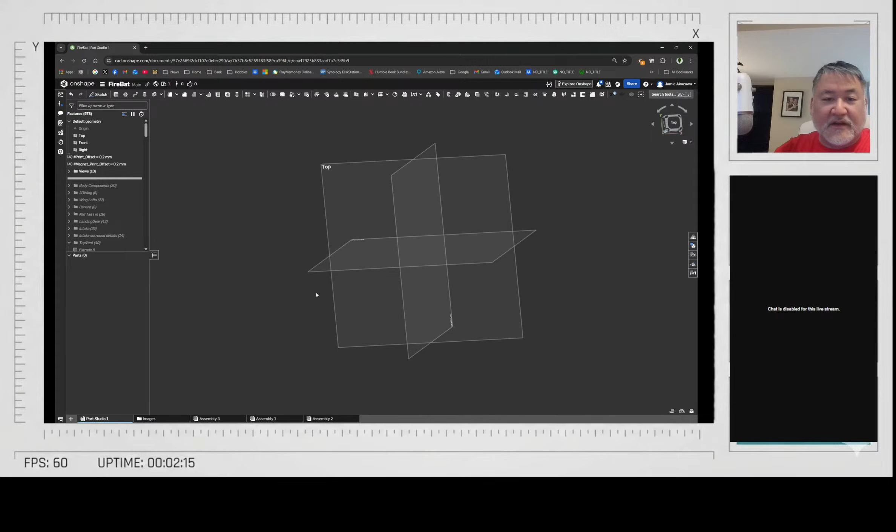You can scroll with your mouse wheel, then right click and rotate around. You can see I can move the front plane, right plane, top plane. Pretty simple, just takes a little bit of getting used to.

From there, what I did was go through my tree. I established what views I wanted to do. I think what Mark's doing with his work on his helicopter design, you can also see how to set that up.

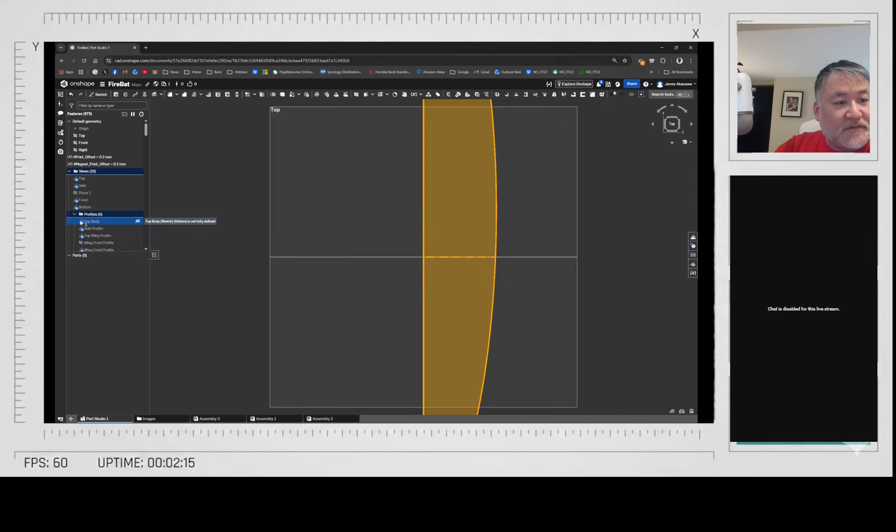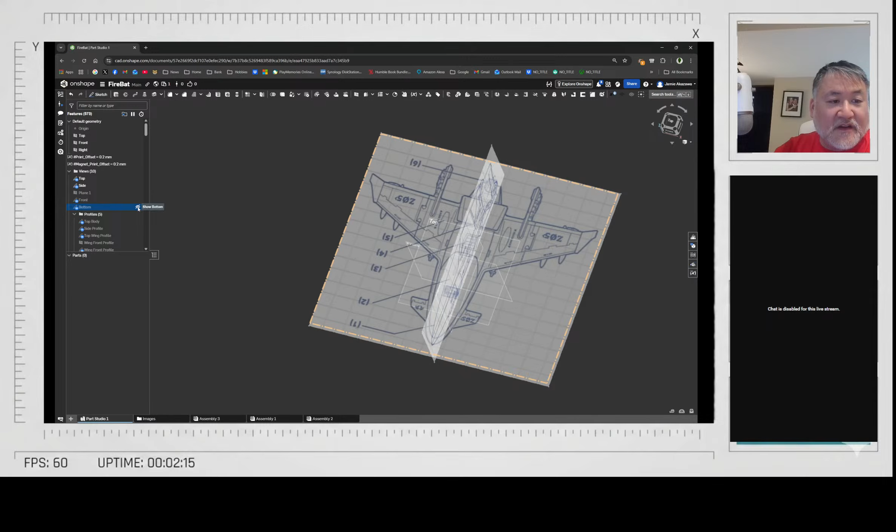I've set up a bunch of different views. What I did was import from the 3D Joe site the different views of their Firebat, the blueprint designs they have for it. Then I oriented them, moved them around so that they're in line with each other. You can see I've got the top view, side view, front view, and bottom. I actually added the bottom view, so I would swap that out for the top view depending on what I was working on.

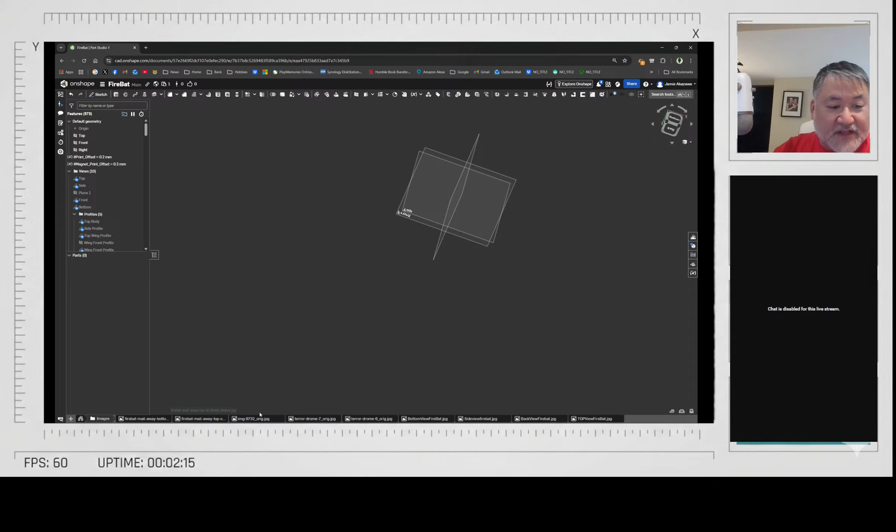To get the views in, you can click down at the bottom here, insert. You can import your different images. So in this case, these are the images I imported — I imported a bunch of reference here.

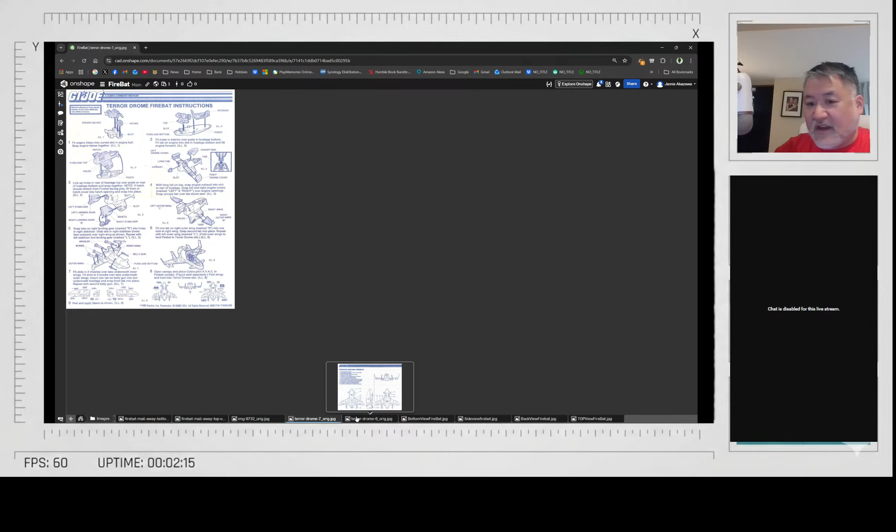I also imported the reference for the instructions on how to assemble, so I can take a look at that and see if there's any information I want to see there. Here's the reference image. What I did was crop all the images out from there, separating them into various fragments, so you can see the top, bottom, side views, etc.

Once I had them there, I established sketches for each of these views. From there, there's a button up here where you can import an image onto a sketch. So say I am in this view.

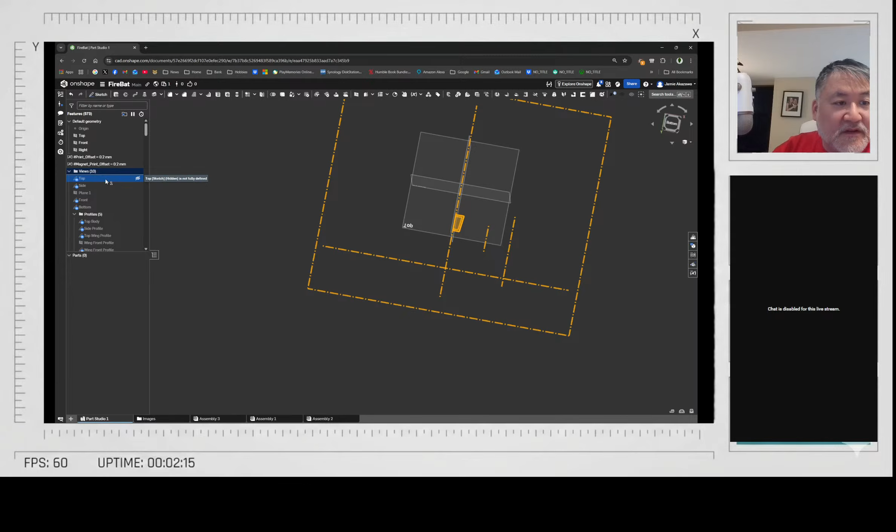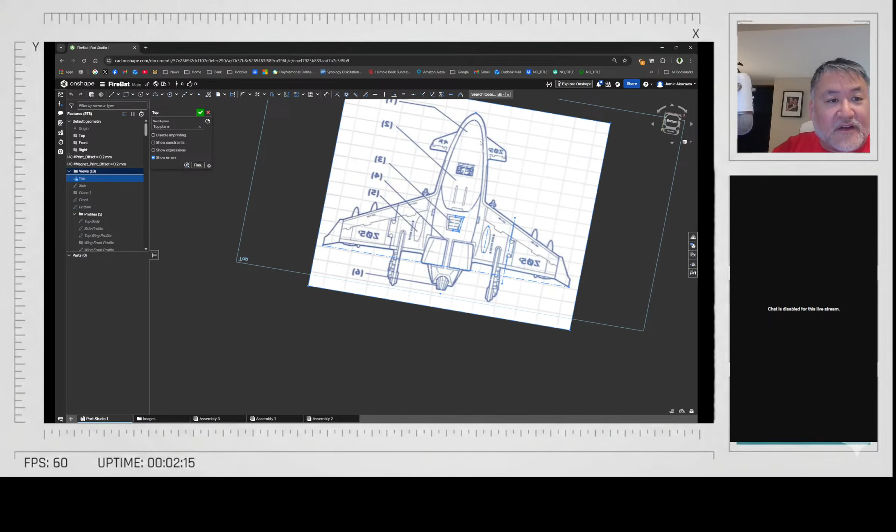When you edit the sketch, there's an option to insert DXF, DWG, or image. So you can insert your image onto that sketch, and then from that sketch you can orient it with various tools. There's a transform tool that will let you manipulate and move the image around so it's actually in the right position. So that's that.

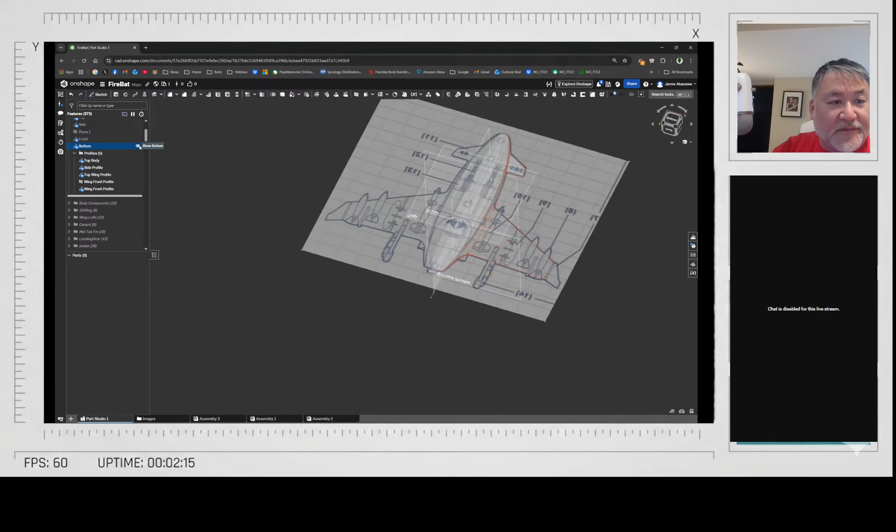From there, once I established those drawings, you started to get into drawing it out. So you can see here, on the top view, I actually activated a bunch of the pictures, but I'll go back a bit.

So the first one, in the order I put them in - this top sketch on the profiles, is probably the top body sketch that I actually started. Oh, here. There it is - so there's the top body view.

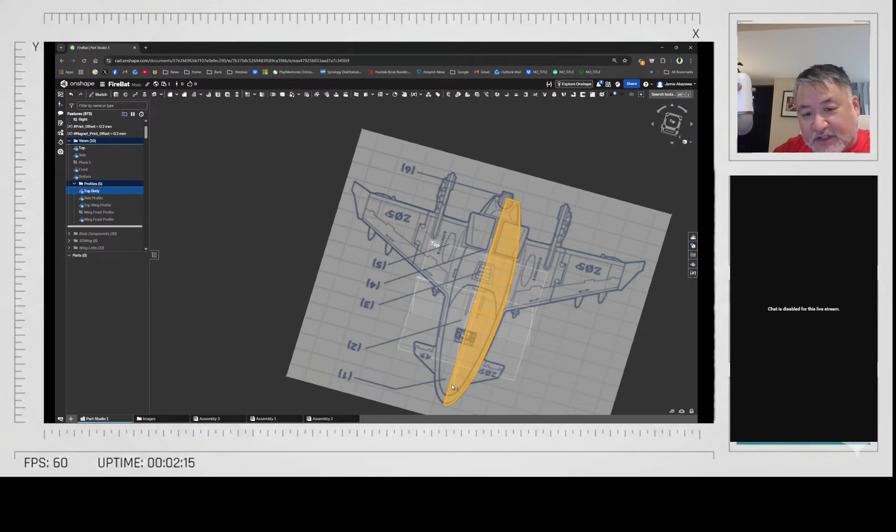You can see how I sketched out the top body. From here, I only did half. Mark's made it fairly clear that if you do half, it's half the work, because there's a mirror function in both the sketch and the 3D modeling side - once you do it, you just mirror it all over and save yourself a ton of work.

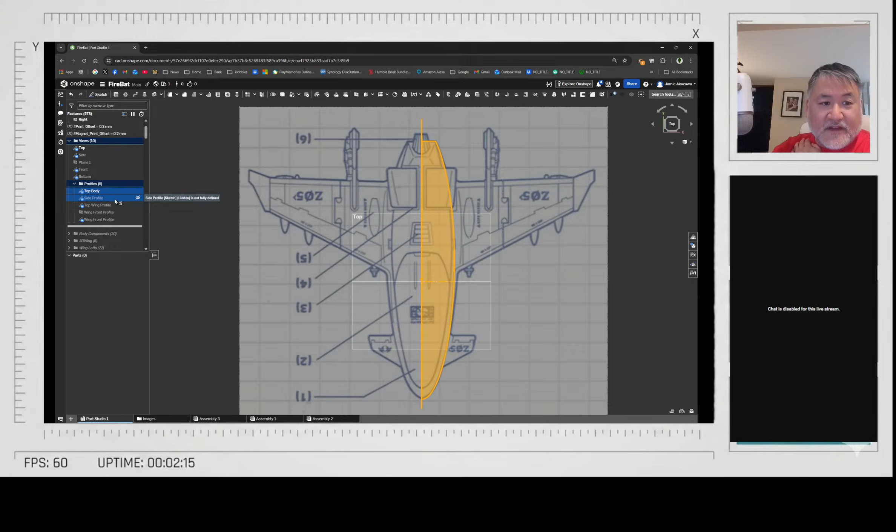So I did the top, sketched out the top, then I sketched out the side view. You'll see a side profile view here, and again that's referenced off of this side view. So you can see I referenced all that, trying to get the geometry.

In the case of the drawing, I had to make assumptions. I couldn't see because this mid-wing here is blocking the view, so I had to guess where that cut was going to be. I put that in, got an idea of what plane goes across where the canard is, where this wing profile is, and where the canopy sits. All that was established right off the get-go.

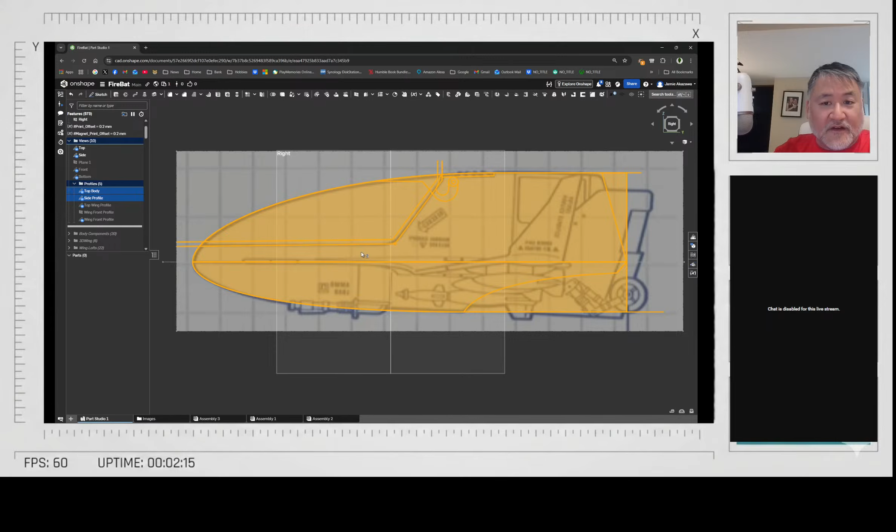From there, I also separated out the wing, so the wing had its own profile. I can hide this view - so you can see I did the wing profile.

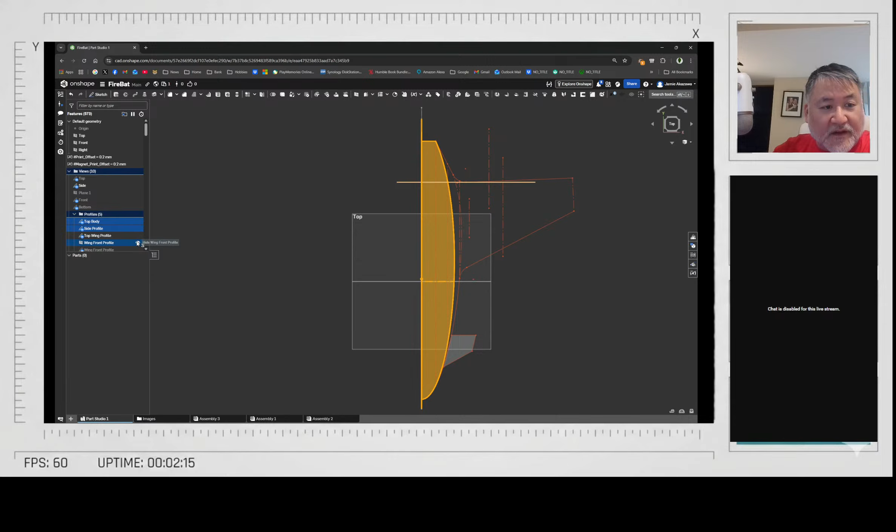Then I also did a profile for the front. This is something a little different than I see a lot of other people who are modeling do - a lot of people, when they model, from what I can tell, will model in big chunky blocks, like a big square or a trapezoid.

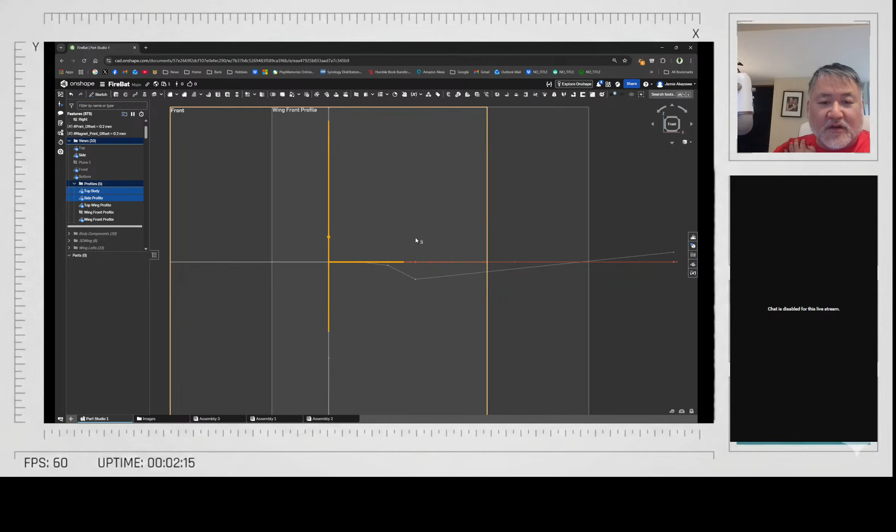I wanted to make my model slightly different, so I wanted this wing to mimic what I saw in the image and in the pictures, where the wing drops and then comes up on a slope - it's not just a flat surface, but has a profile to it. I drew in that profile where it drops some more, gently comes up, and goes off on an angle instead of straight up. So I put that in as well into my drawings.

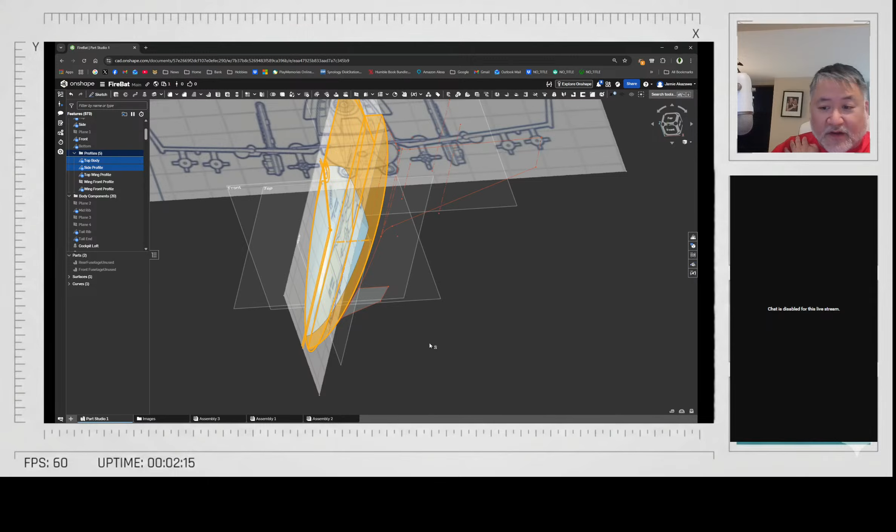From there, once I got all those sketches in, I started on the modeling side. I put in more planes, shut some of these off. That surface we can shut off too - it's highlighted, that's a cockpit loft.

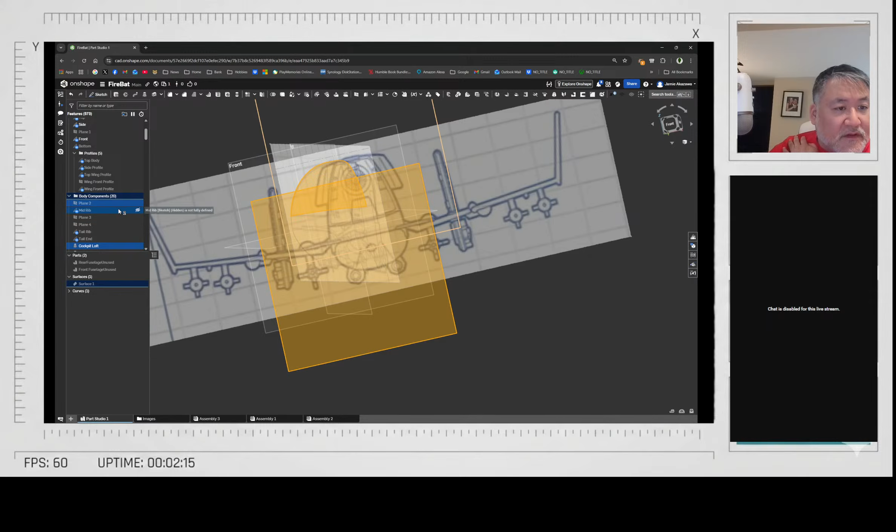From there, I started to put in various shapes that I saw. Let me shut that one off, it's a bit distracting. Let me take this and pull it up to about here.

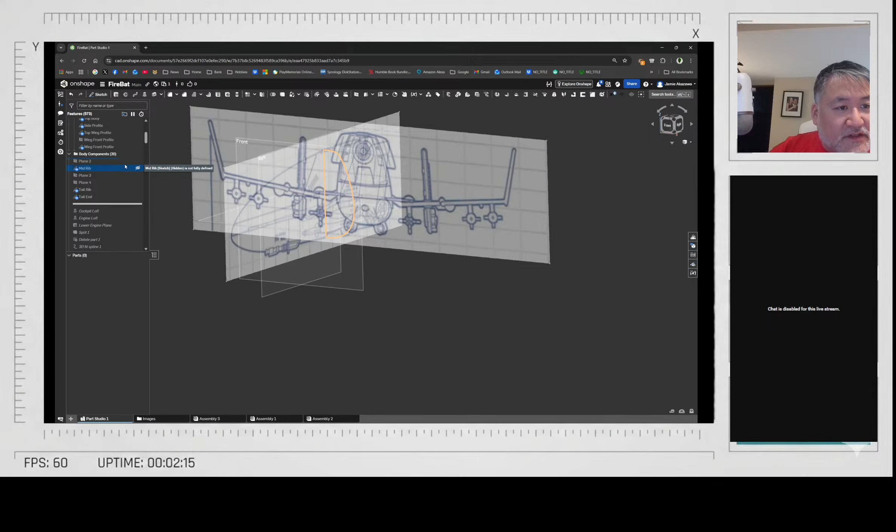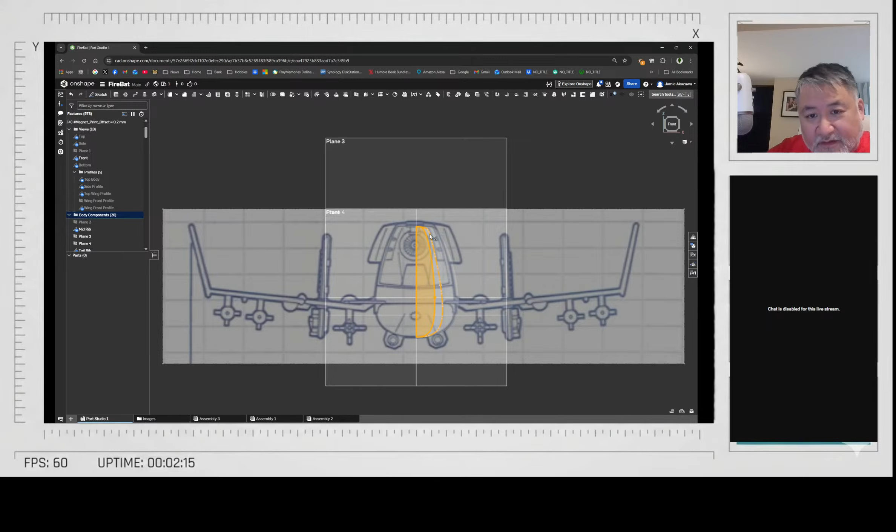So then I started to draw out different endpoints that I saw on the model. I don't know how easy it is for people to see, but I modeled sort of the end of the plane, and back here I did sort of a mid section.

Again, maybe I can pull up this drawing. So from here, I referenced this geometry, which gave me the dimension off of the end, where I thought the end of the plane only goes from the midpoint to here. Then at this point there's another transition with an angle coming off the end, so I put another plane here for that reference.

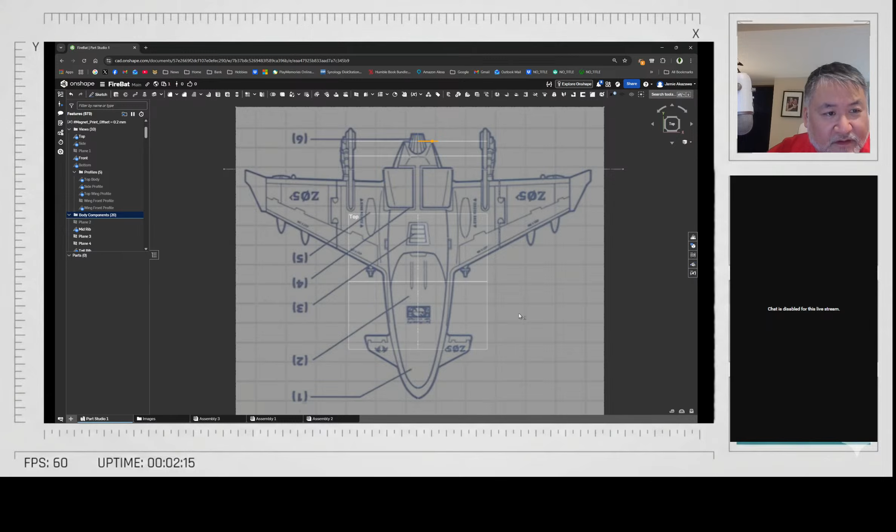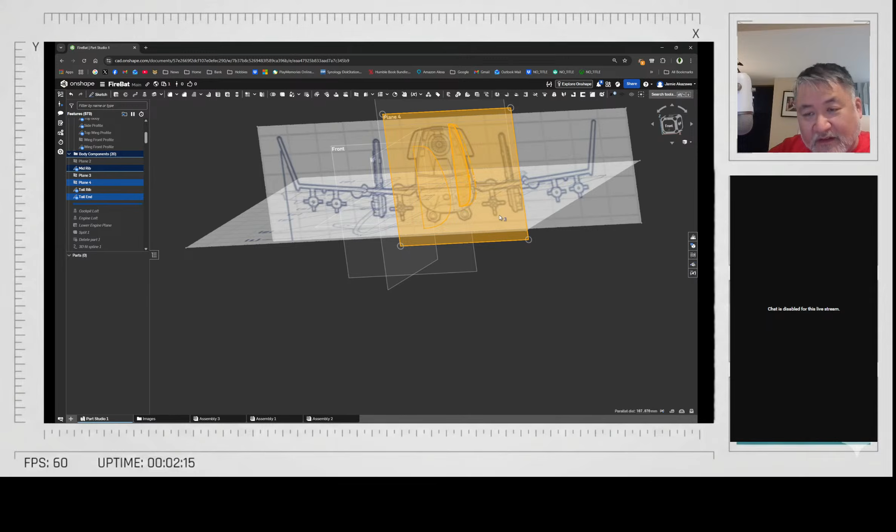And then I put in another plane. From there I actually did another plane - sorry, this is my first time doing this. Oh yeah, here's the other plane, like a mid plane, or mid rib as I called it. So from this point all the way to the middle where it's thickest, and then where it sucks back in and goes in - I put those references in.

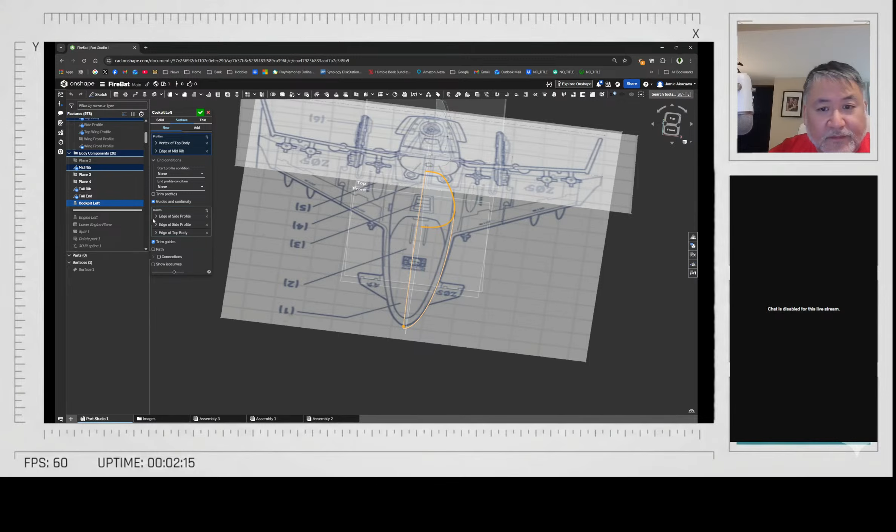Then from there, I started doing the lofts for the plane. And again, this is something that's different than I see a lot of the other modelers do: I'm using lofts. So to get the geometry so that you have a smooth transition and that you actually get a more plane-like feel where it's not boxy, I used lofts.

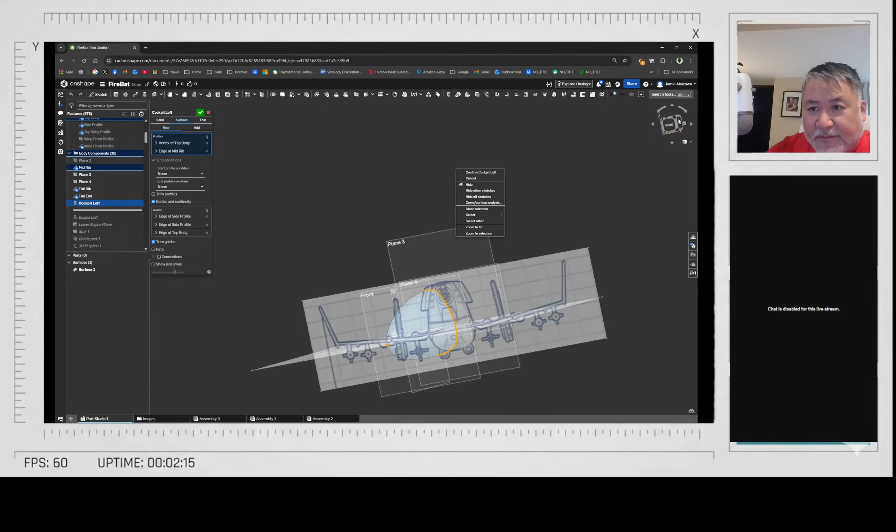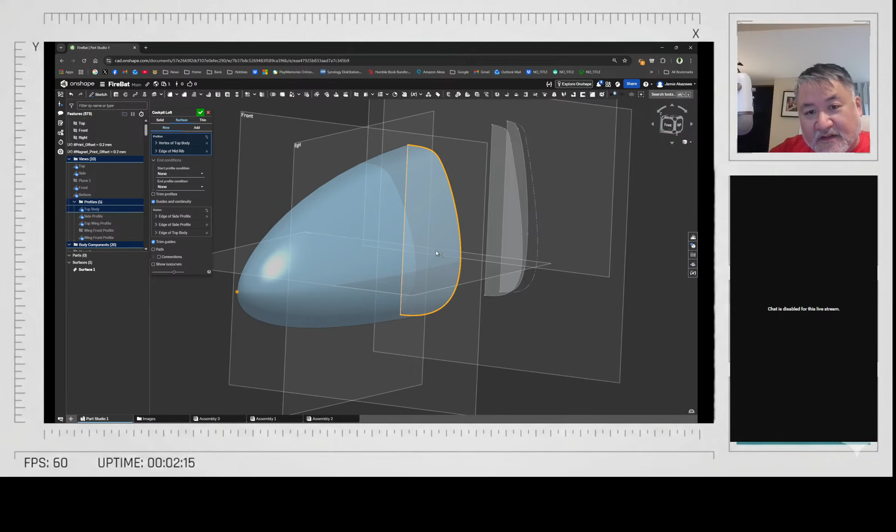So I went from this point and I made a loft that went from here all the way to this midline, or this mid-rib. And you can see from there, if I shut off the top view and the front view, you can see how smooth that curve is, where it goes, and it's a much smoother, it transitions nicely, and that's how it goes through to that mid-rib.

From there, I did another loft for what I called the engine compartment. I can grab that. Oh, I can't. 1 second.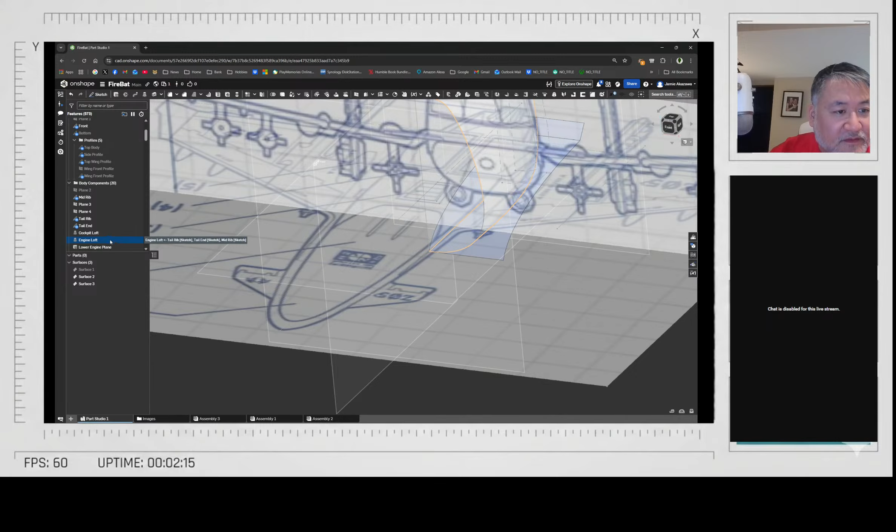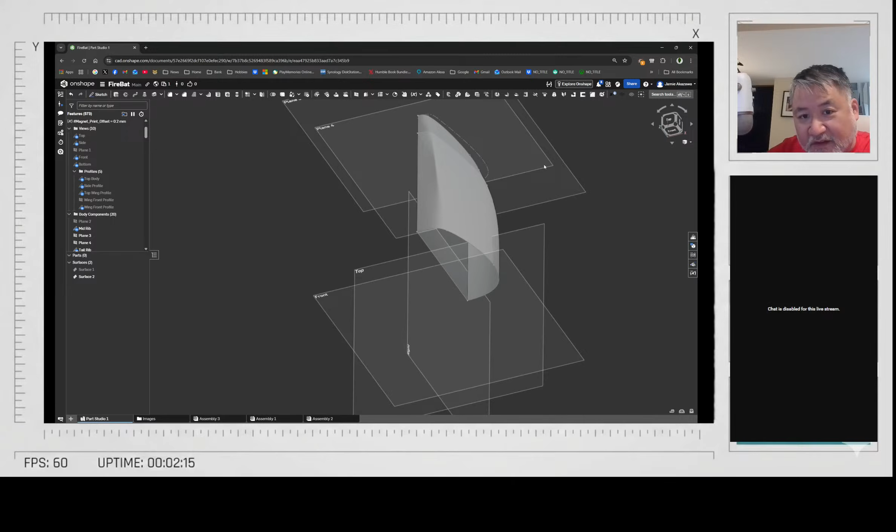So I did another loft for the engine. And again, it's all referencing the drawings. So then from that midpoint, it tapers back in at the end. So I wanted to mimic that taper. So I lofted from this plane to this plane. And again, it transitions smoothly. So then you can have this nice transition here.

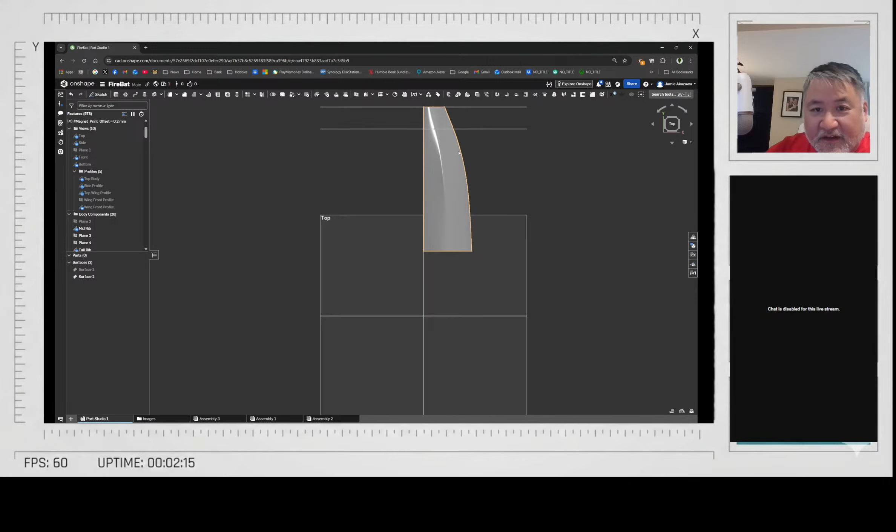And then from there, I thought there was another. I probably could have done this all in one. If that transition is smooth, it probably would have come out equally as nice, if not a little bit nicer, if I didn't have this last bit. But again, I'm new. I don't really know exactly what I'm doing. So I wanted to go from here, transition nicely to here, and then from here to here. So this distance here is a little bit flatter. It doesn't have as much curvature.

So again, all this is done by lofting. So I lofted that surface, and then you get that shell, basically, or the surface. And then that's what generates these surfaces here. So you can see when I actually highlight, now I have kind of the shell of the plane there. And it's two parts. So you'll see this front and the back.

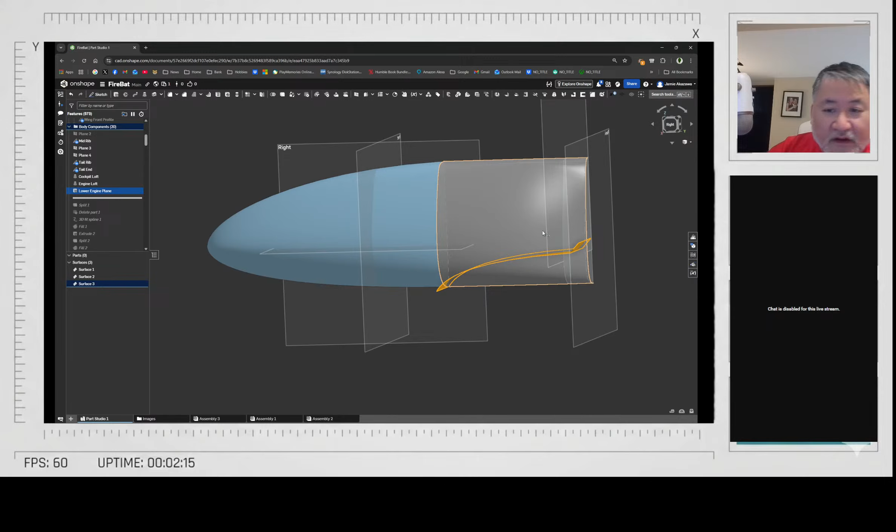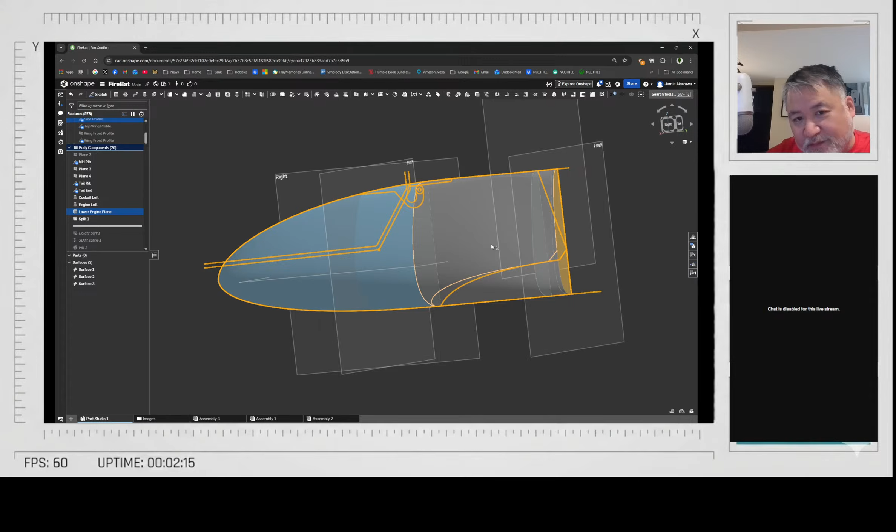From there, I wanted to cut away where the bottom was. So I did a drawing on the side, I believe. I took the drawing from the side view. Sorry, this one here. And then I extruded that surface to cut through here. Then I split the surface. So I actually made that plane, or that surface, cut through the back body part. And then from there, I just deleted that bottom part. So then that doesn't exist anymore. So then that cut that across.

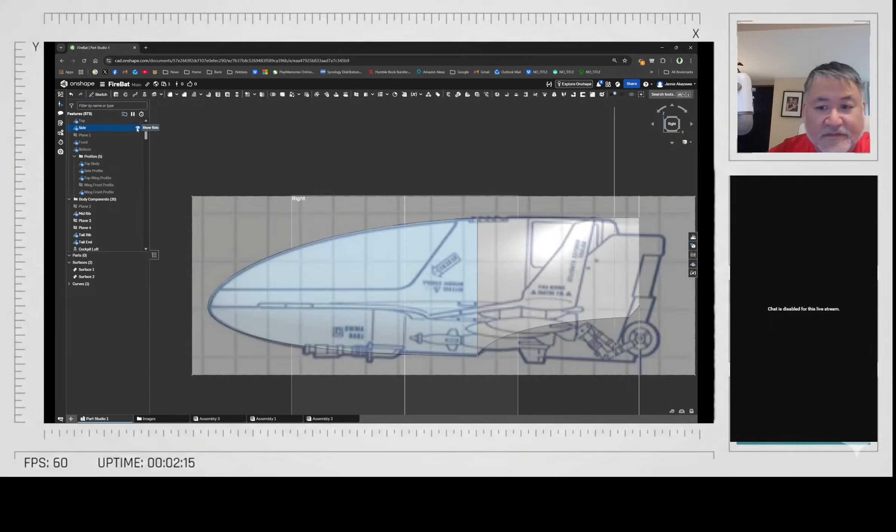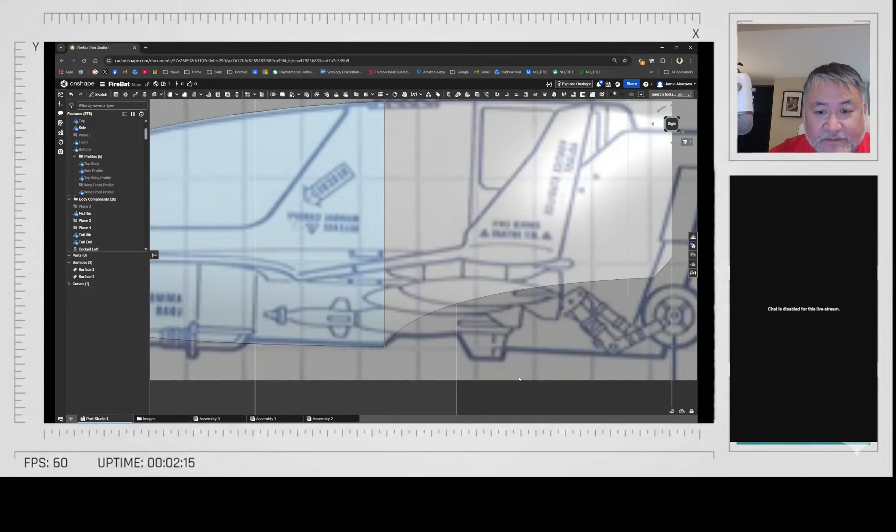And again, referencing the side view, I had this very tiny indication of where that starts and what angle it comes off of. So I used that as reference and said, okay, well, I'm going to do that. And that's where I extended this line through those bodies and then cut that profile out. Again, maybe I'm not using the proper terms. It's all I just do. Then I filled the hole. So this is all fill. And then you continue.

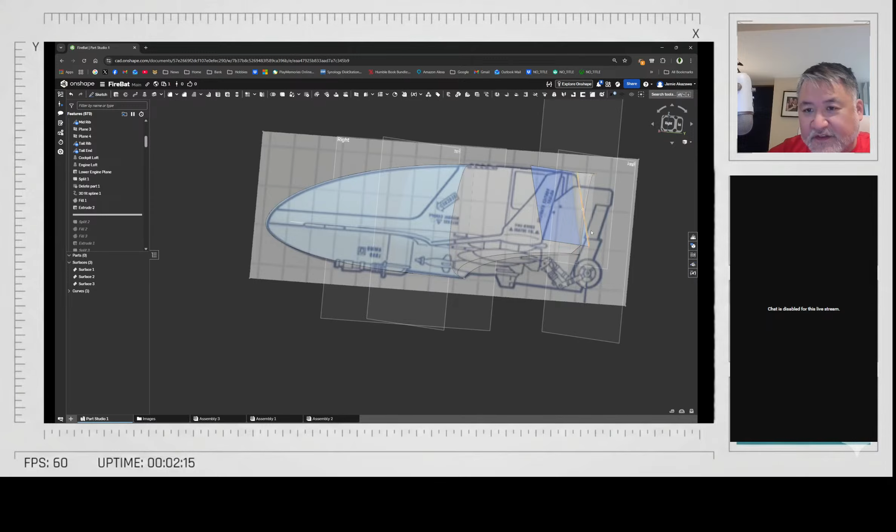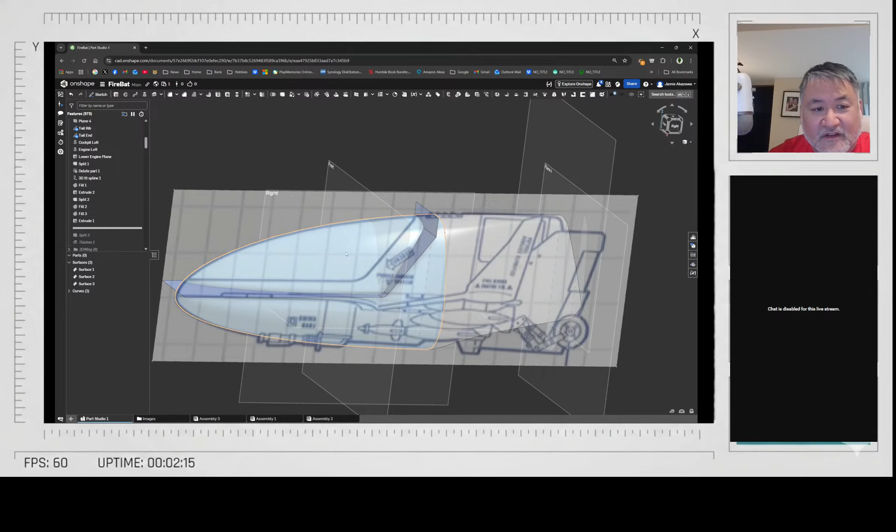Didn't extrude. So again, it's a surface extrude through here, because I wanted that angle through the body. So I extruded a surface out of, again, the first sketch of the side profile. Split it again. And then after splitting it, did another fill. So that's all filled. Did another extrude here of that surface to cut for the canopy. Did a split. So now that's split. Did delete it.

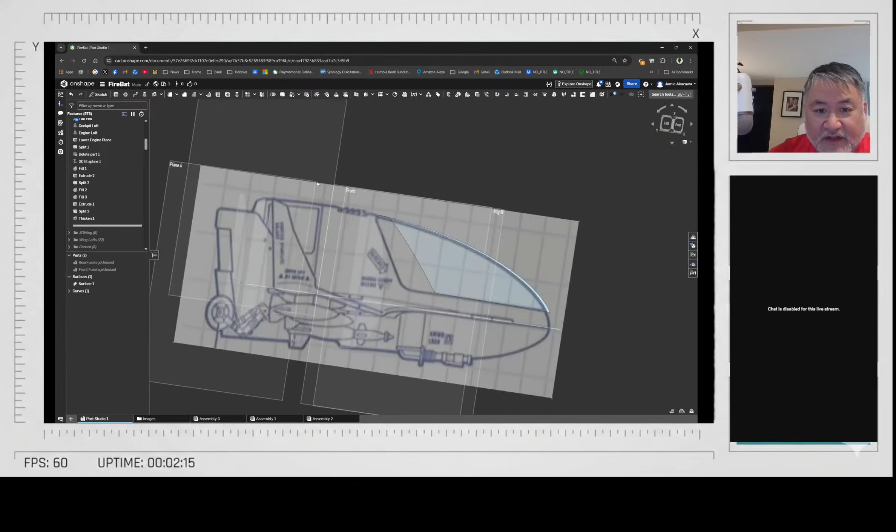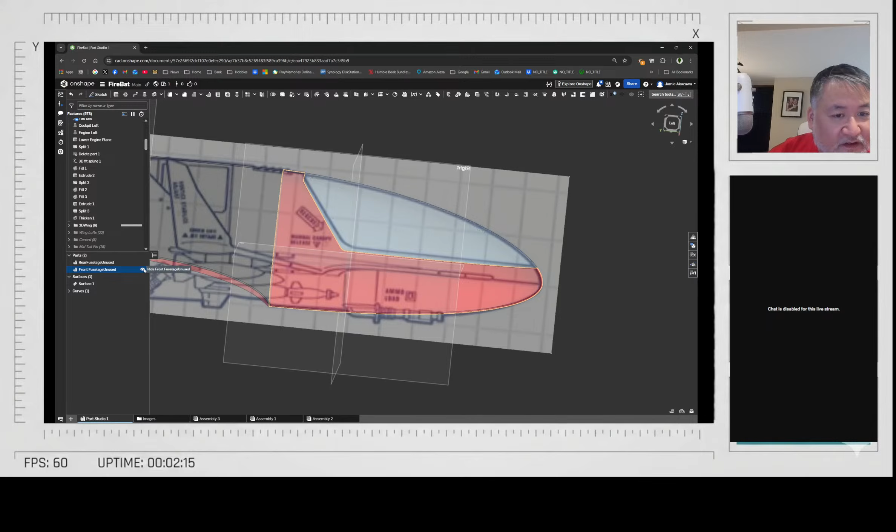Then did a thicken. So now I have my first actual solid body here, which is the canopy, I believe, is what I thickened. Or maybe not. Nope. Sorry, I'm wrong. I thickened the body. I think I left the canopy out for a while. So at that point, now you have the front and the rear fuselage shells. So these are actual 3D shells that can be printed. They have thickness. I believe it's like 1 millimeter thickness. And then that's the body of the plane, of the Firebat.

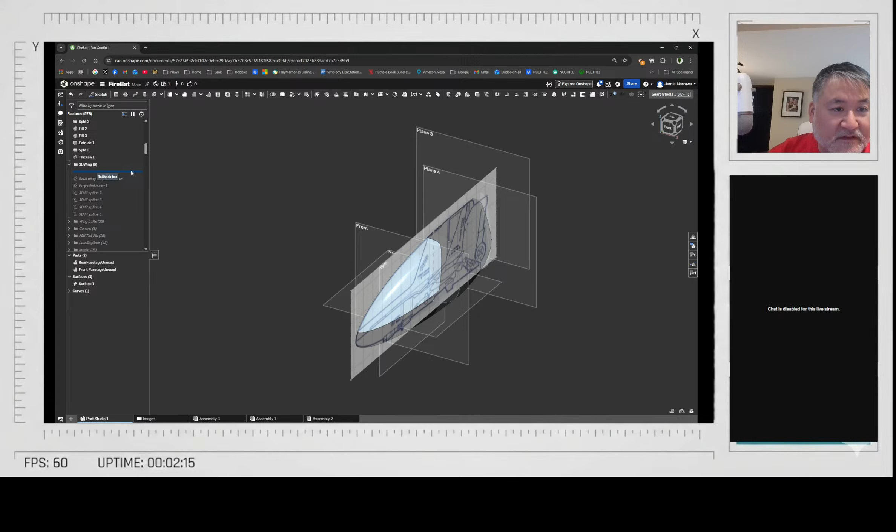Then from here, now I started working on the wing. So the wing, I did a projected curve. So one of the things that's difficult to do is, again, if you're always working in a plane, but you have something that moves through two planes, it gets a little bit more difficult. So I did what's called a projected curve.

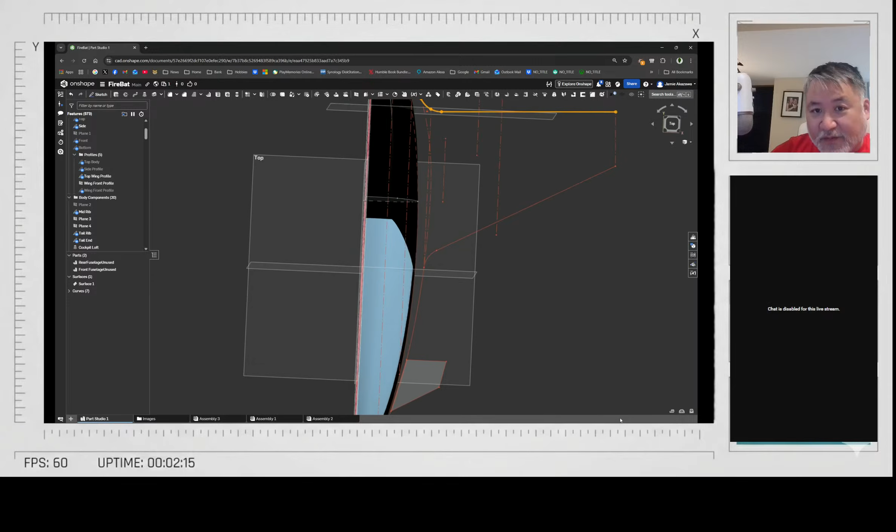So what I did was I took two different curves. If you remember, I did the wing profile. I think I did a front wing profile here, and I did a top wing profile here. The top wing profile shows me the top view where I want that to be. But it's planar, it's all in one plane. It doesn't do me any good that way, because then my wing will be just flat. It'll look just like that. I don't want that. I want it to follow this curvature.

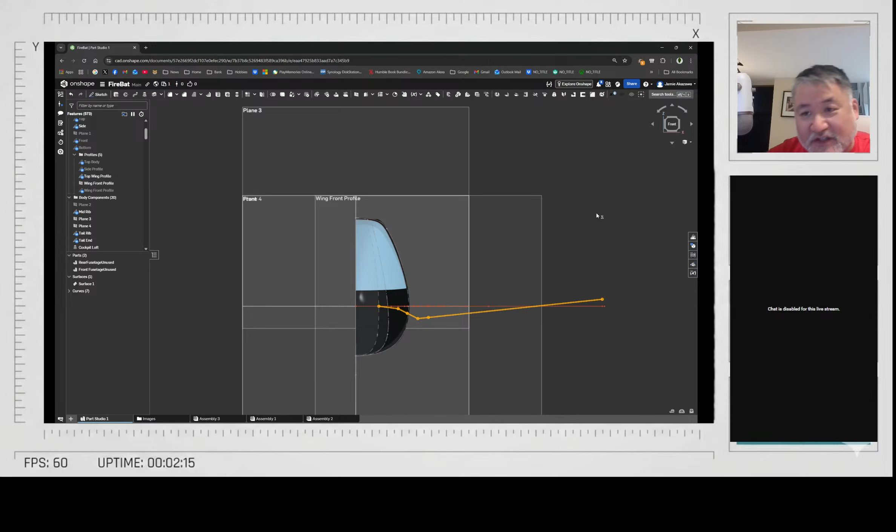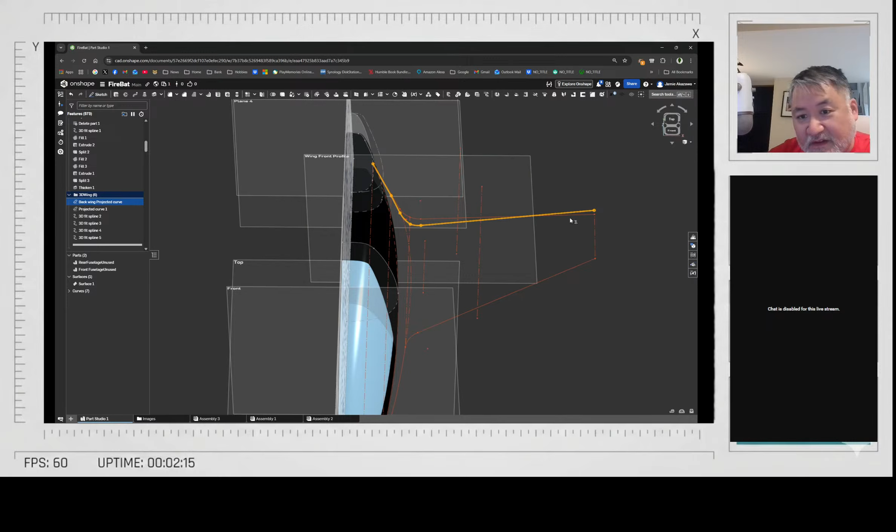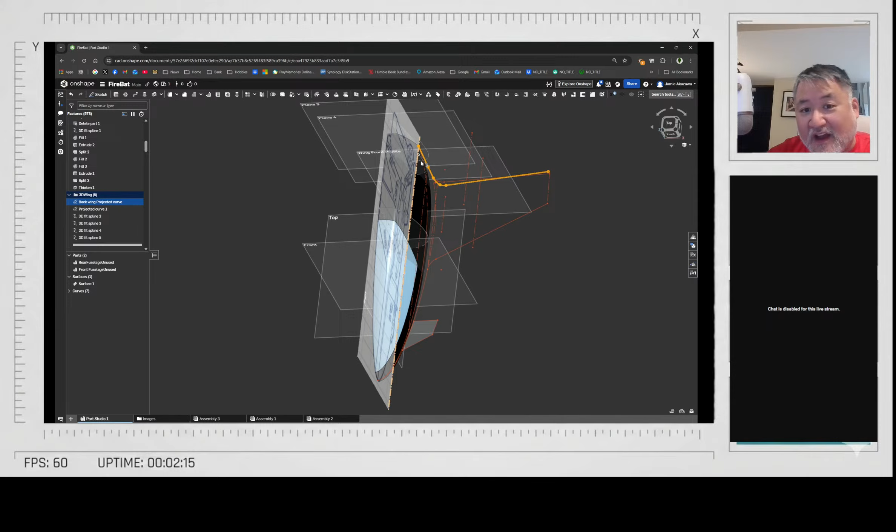So what you do is a thing called a projected curve that combines the two. I had this front view that has this profile here that dips down and comes up. And then I combined it with this top view curve with a projected curve. So now I have a 3D curve that goes through space. It comes out, down, up, right? Which gives you that more organic shape. Instead of very flat geometry, now you have some real shape to it.

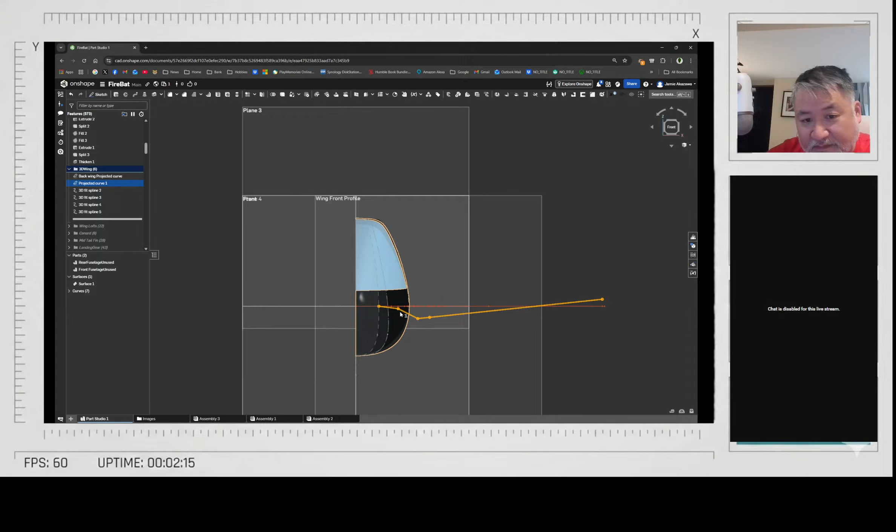So I did that also for the front. Same thing, I used that same profile, so that they mimic each other. So the front and the back are of the same profile here. Then I started to connect them. I had 3D splines connecting those two lines together at various spots. I don't know if they're 100% necessary. I think I just wanted to close that whole shape.

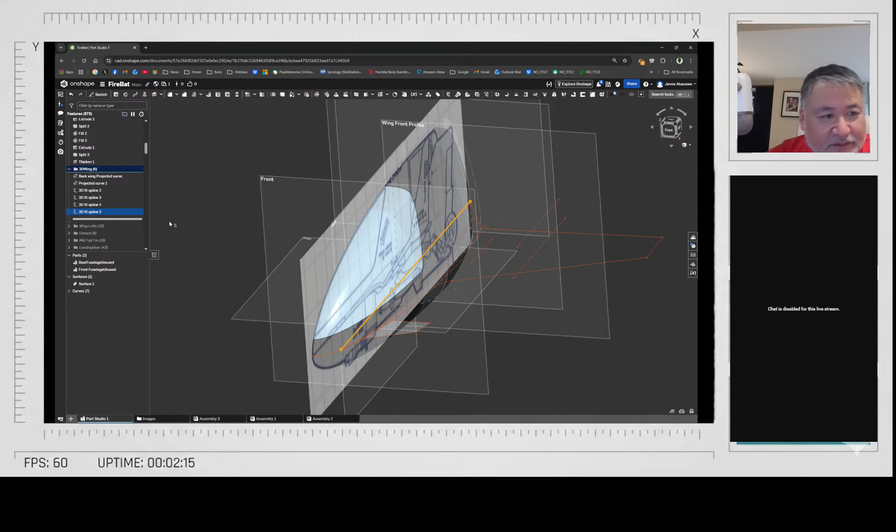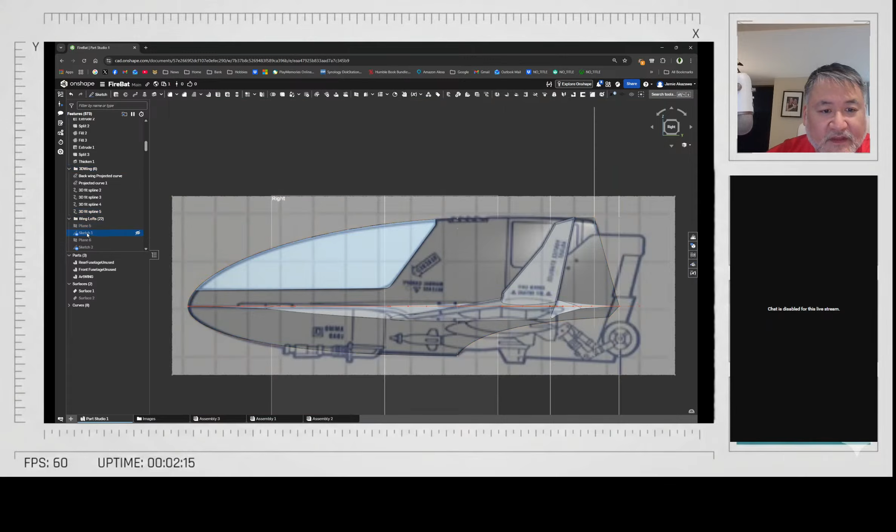But from there, now I wanted to make the wing. You can see here, that's the wing I ended up with. So the wing, again, I started with a plane on this end, generated a plane on the right, generated the sketch. This sketch is kind of on the inside of the plane, but I needed to start somewhere. I wanted that surface to look like this, even though it's not really an airfoil. An airfoil would be bigger in the front and taper off in the back. This is a surface that's coming out of the surface of the fuselage. So I just kind of sketched something out.

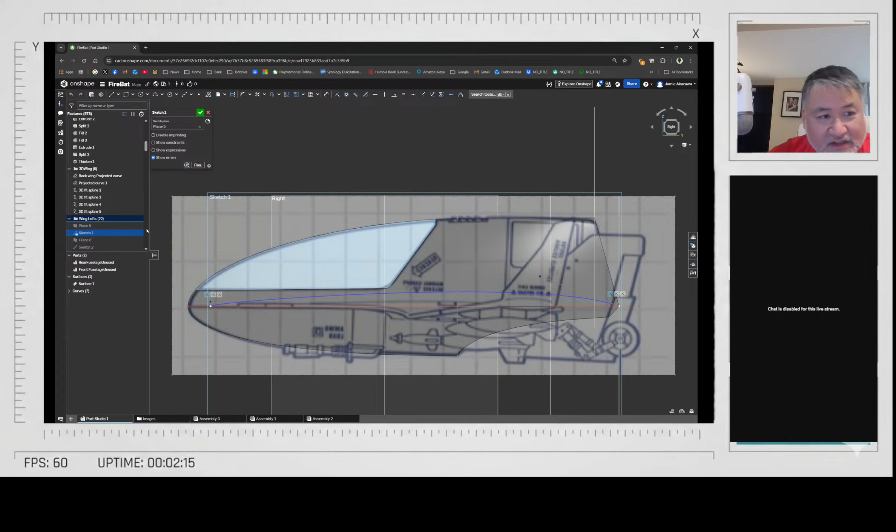Did another plane. Did I use that one? I'm not sure if I used that one there. Getting lost in my own stuff here. Wing lofts. Oh, here's the sketch for that one. Let me shut off some older sketches here so you can see. It can get a little complicated.

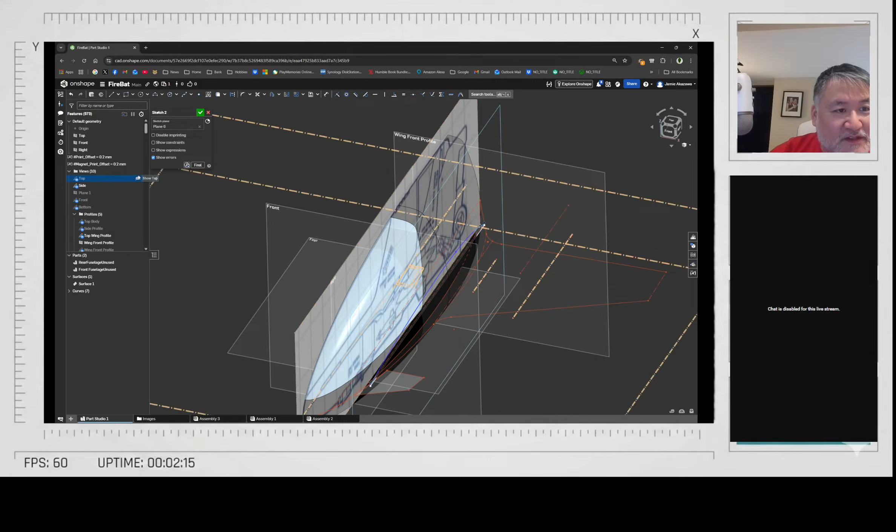This is kind of my first big project that I've selected for myself in Onshape. I think I bit off quite a bit. It's been fun, sometimes frustrating, but ultimately it's been a fun project. But it can get daunting and you can get lost real quick.

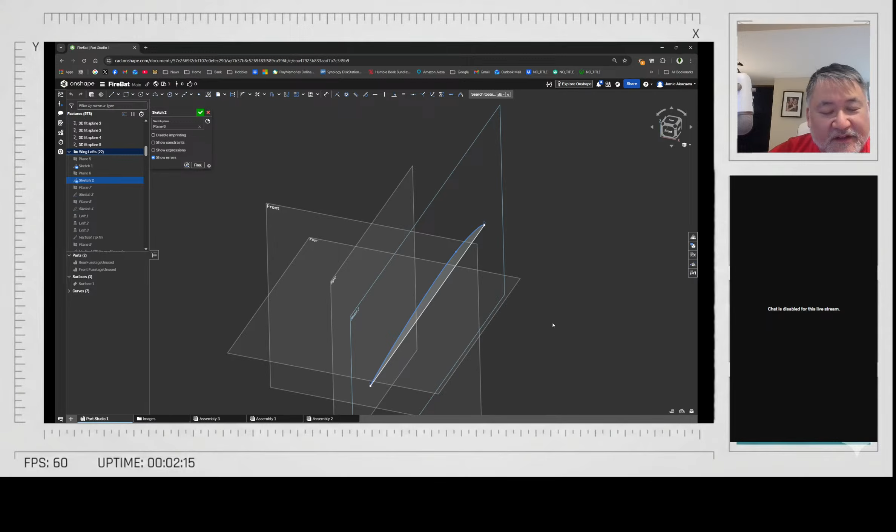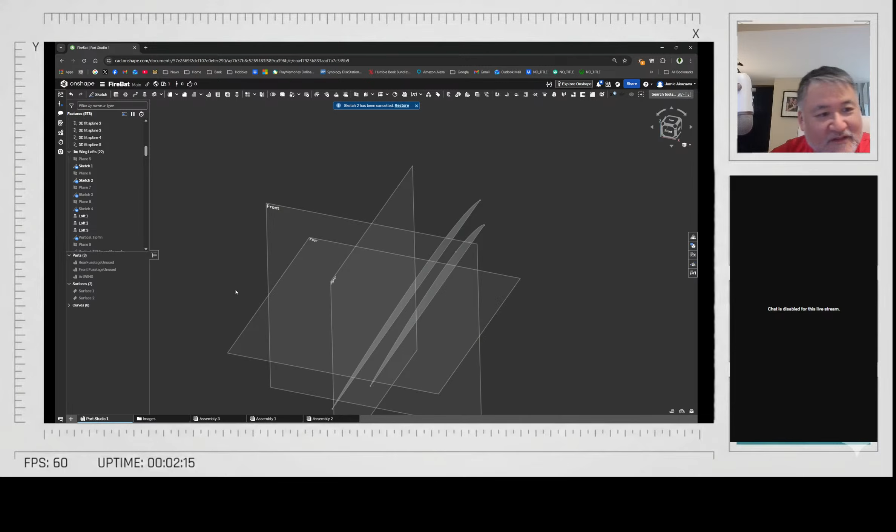So there's that sketch profile. Oh yeah, here, then there's a second sketch profile. If I turn this one on and this one, now you can get a better view. Let me shut off that body. So now you can see the progression. I wanted this profile to loft into this profile. Again, a lot of it's lofting. And then I put in another profile here. This is where it started to become more of a wing.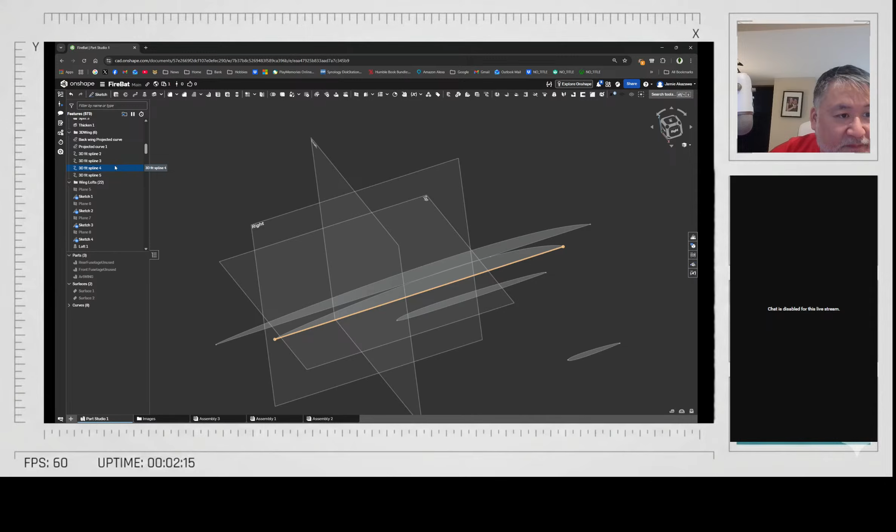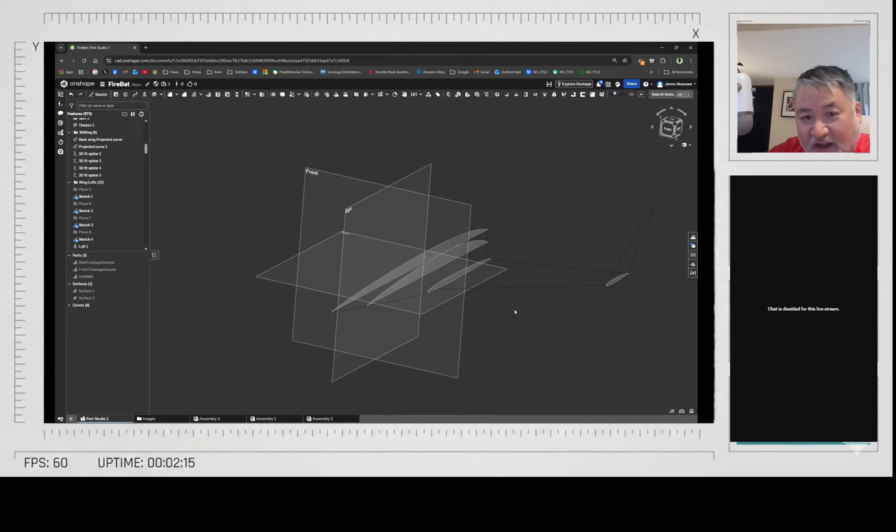And then the tip here. So all those are off of the geometry of those connection lines from where I located all these splines, all these curves. See here, this might explain it a little easier. So again, this is the 3D curve that went through those projected curves, and I connected points here, here, here, here, and here, here. I used those to actually create my planes. So you can see all those planes went through those lines.

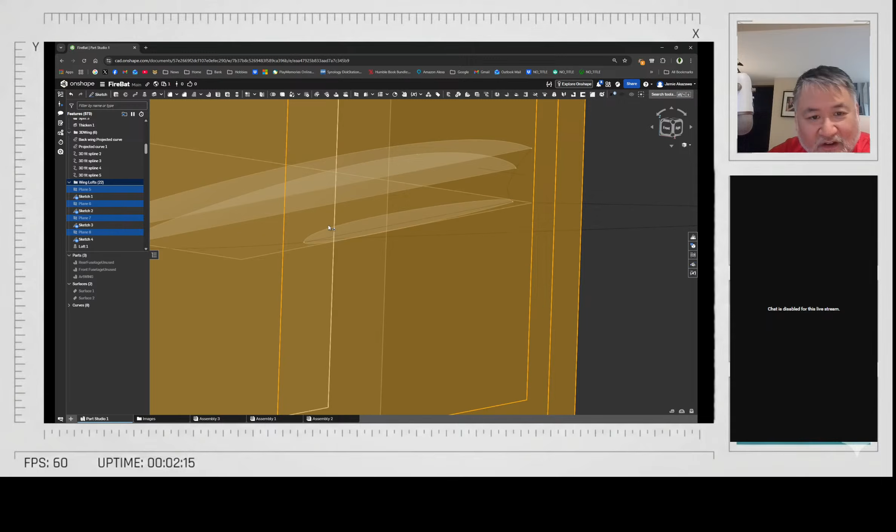Once I had those vertical planes, then I made the sketches for the wing profiles. And again, you can see it's closer to an airfoil. It's not exactly an airfoil, but I made these splines that kind of curved out to make it look like an airfoil. And again, if you look at my models when I physically printed it,

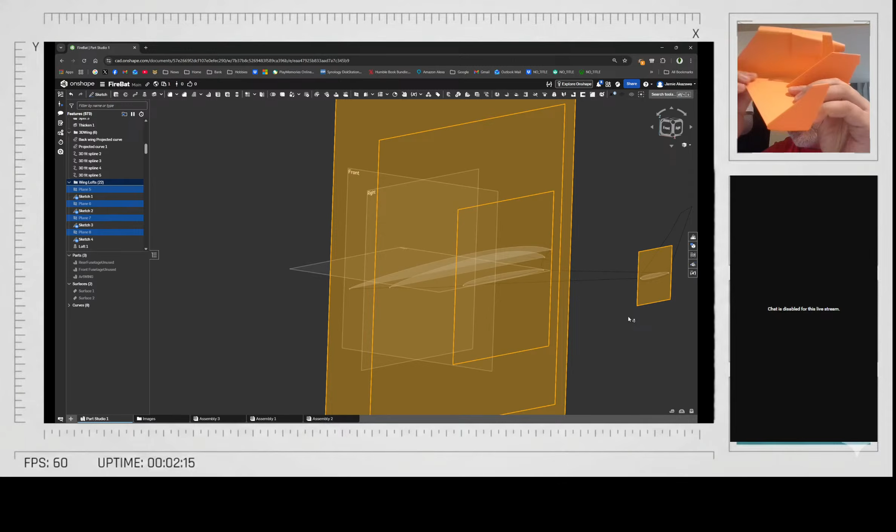you can actually see it actually did print. It feels like an airfoil there. This is very thin on this side, very thick on the front end. And it honestly feels like it could fly, even though, again, it's just a toy.

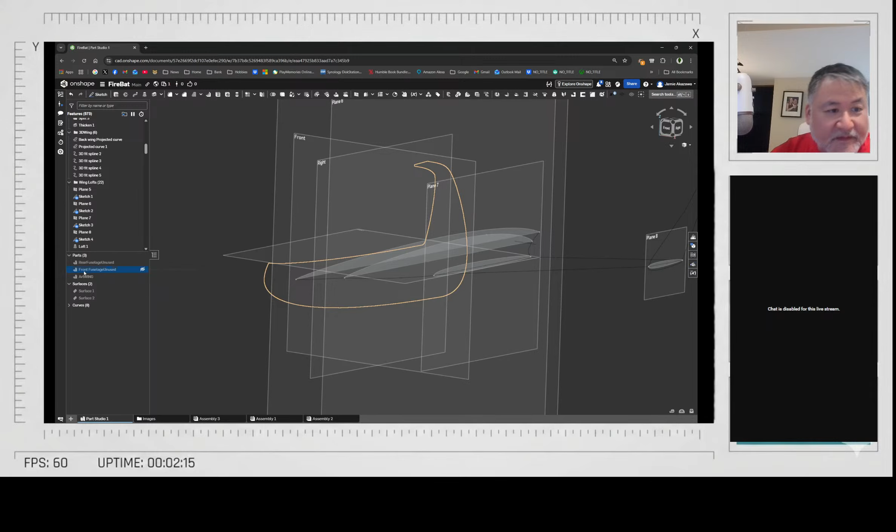So from there, because I had those profiles at various positions, and they're all connected to each other here, there, and there, that's when I did some more lofts. So then I lofted from the first to the second, second to the third to the fourth, and then that's what finally gets you your wing shape there.

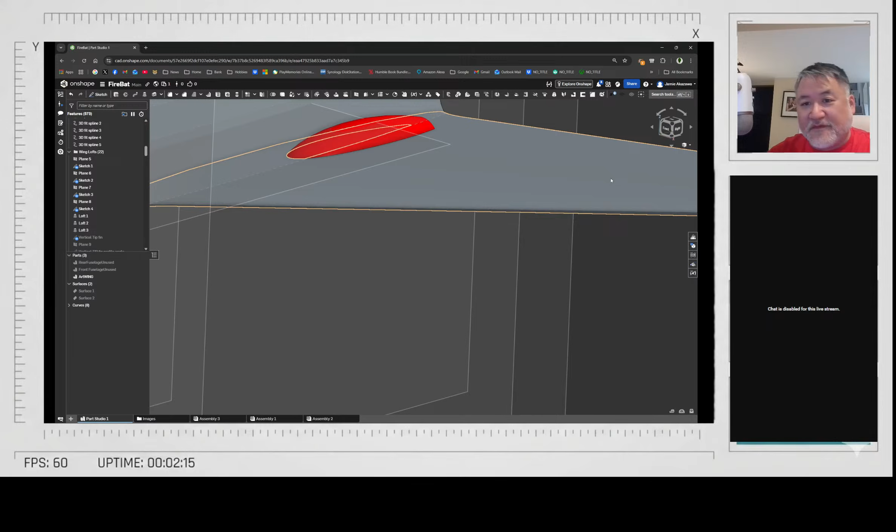So that's how you get a more organic looking wing shape without having to do a bunch of fillets and then adjusting fillets, putting square geometry and trying to round it out. You can actually create a profile and then use that profile to create the rest of your wing shape. It's a lot to kind of figure out. And then once you start to do it a few times, you start to get the hang of it. When I did this wing, I probably did it 3 times before I finally figured it out.

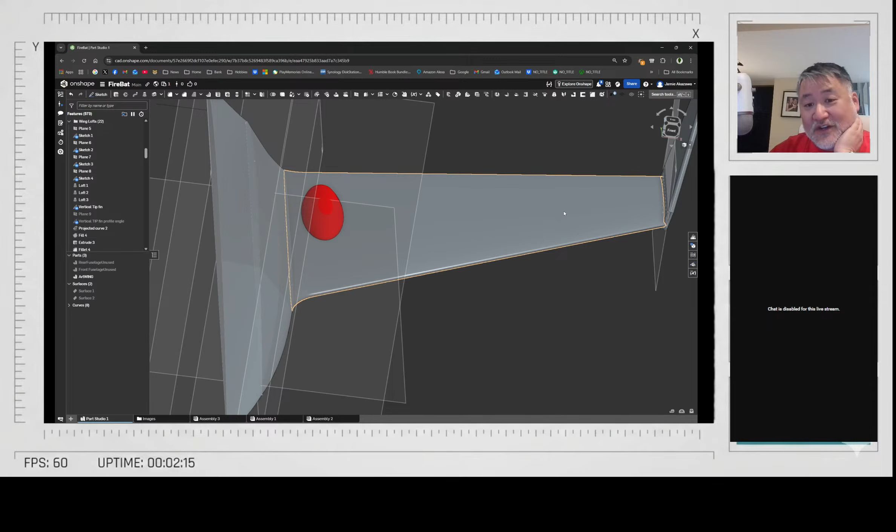So again, the way I'm explaining it might sound a little bit overly simplistic, but it took a while to get that shape to look the way it is. And again, I even had doubts on this because I wasn't sure if I could put the panel lining and do all the other stuff that I wanted to do to it. So there was a lot of doubt on whether I could finish this the way I wanted to. Luckily, it's all worked out so far.

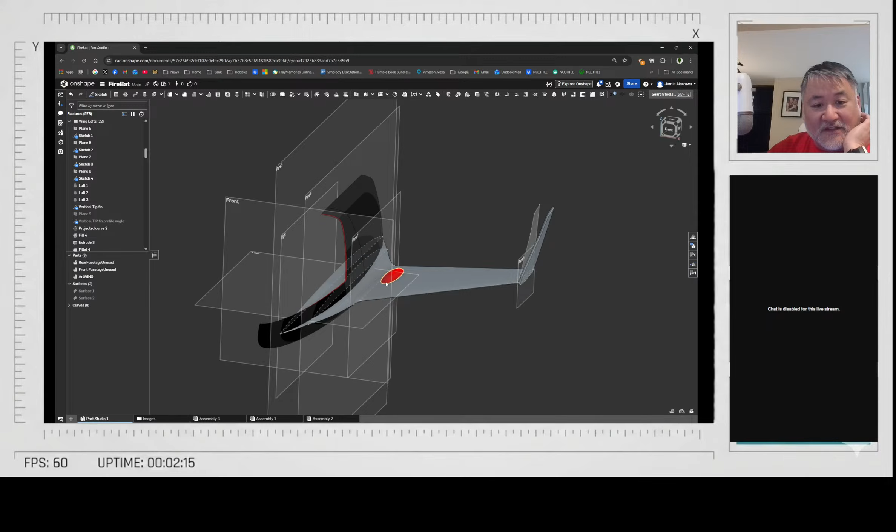But that's how I got to this point where you can see the fuselage. It's interacting with the wing. I actually put in this little mini fuel tank boss that actually is sort of the negative point for, I think, there's a bomb here. Closed it off there. And then put on this tip stabilizer wing on the end. And again, this one's canted as well.

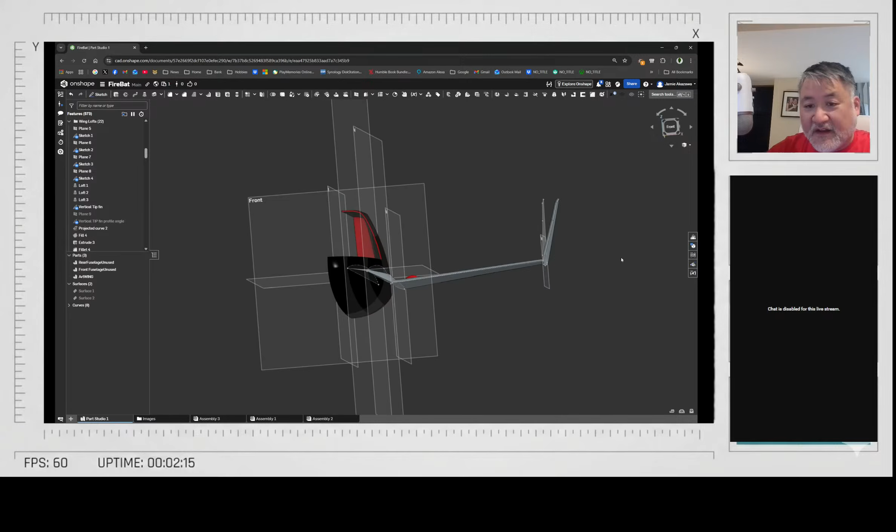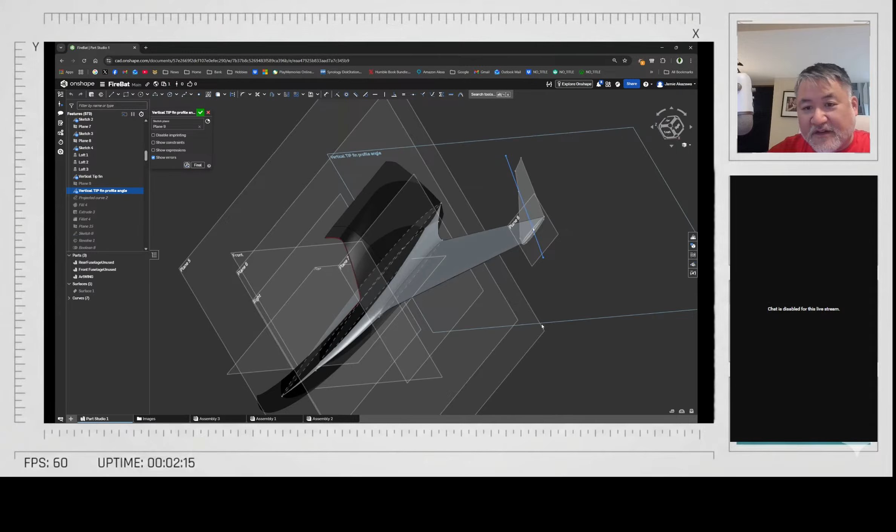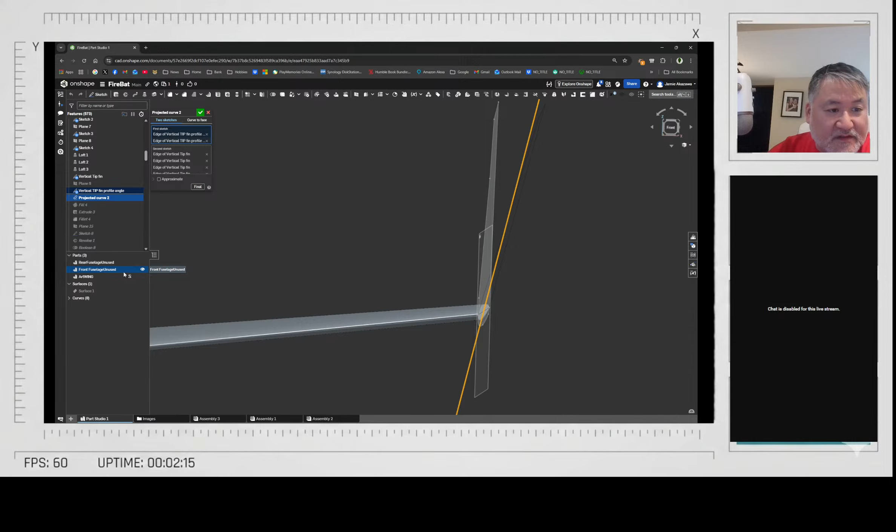And again, that comes from putting in a sketch and then canting it. Here. So again, I did another projected curve. So I drew the wing here on a 2D flat plane that's vertical, and then I took that and projected it against the angle that I wanted here, and that's what tilted that whole drawing over. And then I extruded it and thickened it, and that's why it looks the way it does. So that's why it turns out like that.

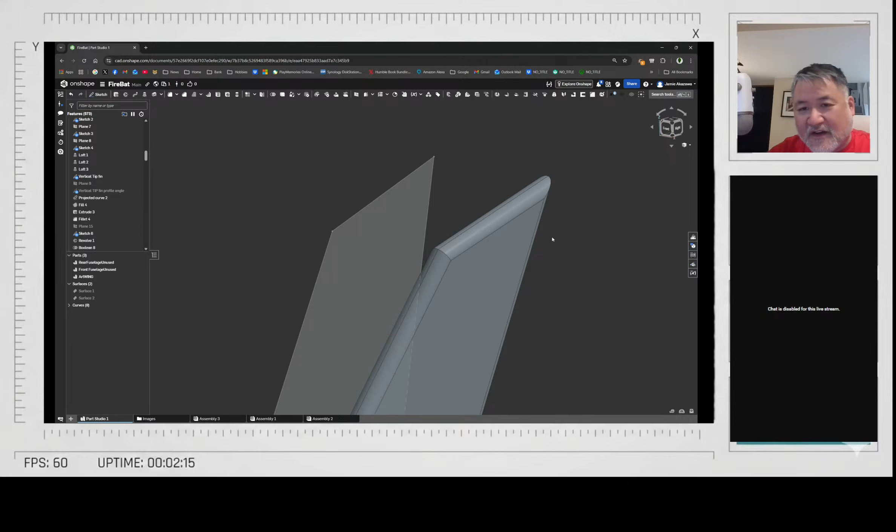And then once again, you'll see these have fillets and stuff like that. I try to push doing fillets out until I'm actually finished, because if you do fillets too soon and there's too many of these interfaces here, it causes all sorts of havoc to your model. So I try to push those out to areas where I know I'm not going to alter this anymore. So that's when I'll do the fillet. If I start doing fillets all over the place, I think it messes up the geometry. It makes cutting or altering my geometry a lot harder.

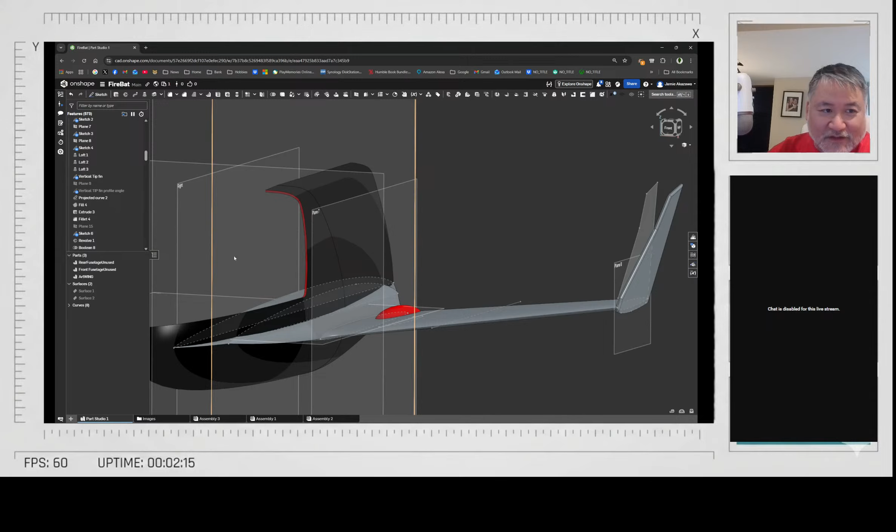So that's what I've got so far. I'm going to end it here. This is the first one. I'll see how people react to it. Again, my description's not perfect, but I can continue with it. Eventually, I'd like to be able to do live modeling where I'm doing that helicopter design, but I figured for the first couple, reviewing how I did the Firebat and giving people an idea of how much work was involved in creating the Firebat design would be a neat one to post.